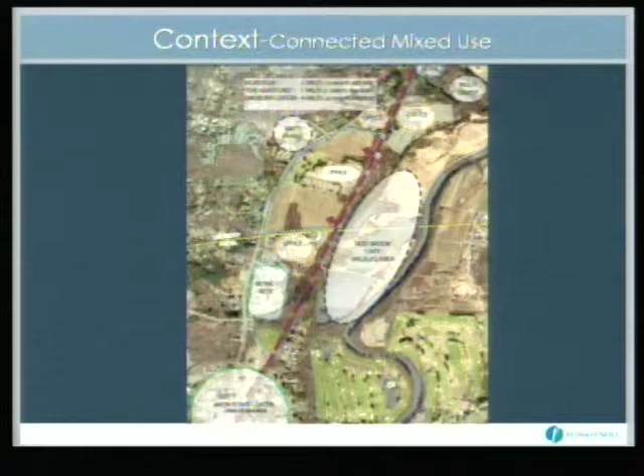And two of the key factors with respect to A, Garden Homes' interest in this development, and B, some of the initiatives in Simsbury are two things. One is we are enamored with the relationship of that bicycle trail and how it connects all of the various components, not only to downtown Simsbury, but downtown Avon, the mixed-use office areas, and then directly across from that bike trail, the Nod Brook Wildlife Sanctuary. These are important elements for a developer. It creates uniqueness, it differentiates this type of project from other projects.

So again, this particular site in this area of Simsbury has certainly not been unstudied. There's been a lot of study here. The POCD specifically supports mixed use in this area and goes so far as to establish desirable performance objectives, which we'll talk about more when we talk about the design. The incentive housing zone study was done a few years ago. Basically, this site was a Tier 1 priority to be designated as an incentive housing zone, which recommended mixed use with approximately 250 units of supported mixed types of housing.

Fuss & O'Neill basically did the Route 10 corridor study, so we're very, very familiar with the character issues associated with two things. One is the continued view to those ridgetops and to the Heublein Tower, and two, to maintain the two-lane character of Hop Meadow Street through the area.

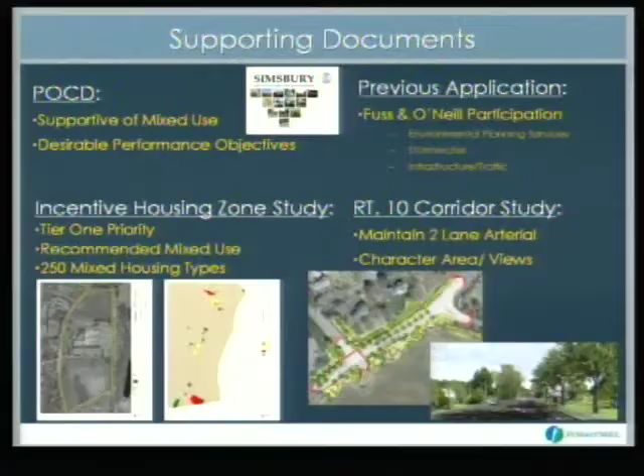And what I will say, as part of even previous applications for this site, Fuss & O'Neill was involved in the infrastructure, stormwater management, and traffic and transportation aspect of that. So we have a lot of data.

In fact, we had our traffic engineers, for example, crunch some of the data and indicated that from a traffic generation standpoint, it would generate approximately half of the volume that was associated with that previous application a number of years ago. That previous application was still able to, within reason, maintain, depending on definition, a two-lane road, and it would be studied further as we get into the application process, but clearly the traffic impacts are substantially less and the two-lane character would surely be maintained.

POCD goes as far as creating fundamental tenets for this particular site. I mentioned a couple of them: preserve views, the open space along Hop Meadow Street, a part of an open space to be preserved to try to symbolize the character of what are now fundamentally open farm fields, and then access to the recreational areas, which I mentioned prior.

So a little bit about the analysis. We're very careful about how we place buildings on this site and where these buildings go and what density looks like on this site to try to maintain those tenets for the site.

What this shows is these are view cross sections through the property and then up to the ridge line, the Talcott Mountain ridge line. And they're taken in a number of different areas. And these little enlargements, although difficult to see, talk about a one-story pitched roof building, two-story and three-story, and where they would need to be placed on the site so that, from a view from Hop Meadow Street, you actually see over the roofs of those buildings and still get a view of that ridge top.

Now, that's not to say that there might not be some buildings blocking some parts of it, but the idea of this design and the planning process is to basically try to maximize the view to those ridgetops.

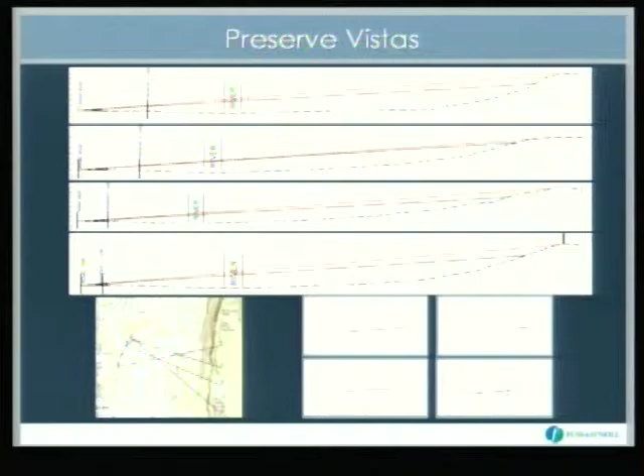This is the resultant analysis from those cross sections, and these pastel shaded areas: the front of this right here is where a one-story building with a pitched roof could be located and you'd still be able to see the ridge line. The next layer, sort of yellow ochre, is where a two-story building could be placed and still see the ridge line. Similarly, this point, three-story, and at this point, we just put this on for illustration purposes, that is a three-story building and you'd still see 200 to 300 vertical feet of the top of that ridge.

So what does this do? Initially, when Garden Homes came to us, this was the site that they wanted to look at. After we performed this analysis, it was very clear that any type of density, vertical density, on this site would have some substantive impacts to the views to those mountainsides.

We basically suggested that they look at this site right here, because as you can see, as this site drops off and as it has a lot of depth to it compared to the northern site, the impact to views from rooftops, even at 3 stories, is almost non-existent, and I'll show you a couple of slides that illustrate that in a built form in Avon.

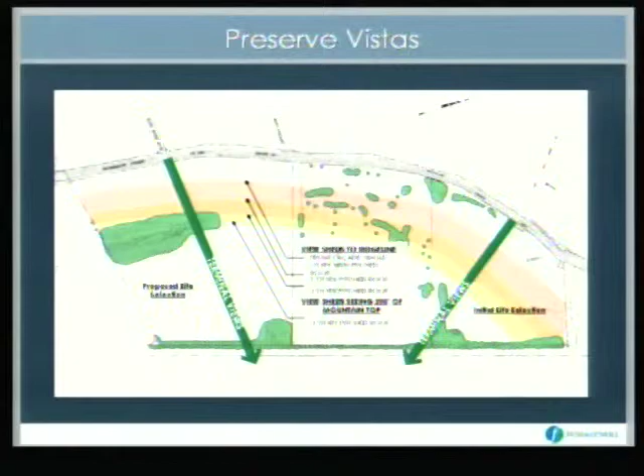What I'm going to go through fairly quickly here is a series of slides almost in movie form. You see the little red dot in the lower corner, that's going to move. We're going to go down the street, traveling south first, and show you the views into this site, and then we're going to do the same thing traveling north.

And what I want to point out is a few things. One is that it's winter, so we don't have leaves on the trees. The second is that I think you're going to be surprised at how little of this mountain you actually see. And there's a whole bunch of reasons for that, a lot of which pertain to landscape, that pertain to the ability to see or not see the mountain at any given point.

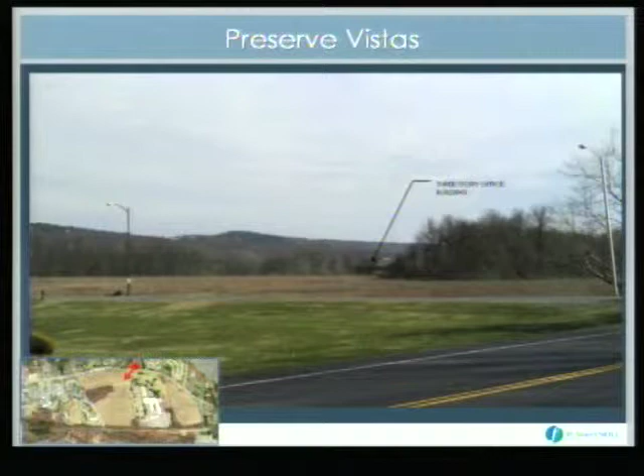But one of the things in this picture I wanted you to note, and I'm glad Hiram turned off the lights because we wouldn't have been able to see it otherwise, is that building. That's the office building in Avon. That's a 3-story building, obviously far back in the site. But what you can begin to see is that 2- and 3-story buildings that far back in the site, from a view to the mountaintop standpoint, won't have a substantive impact to that view.

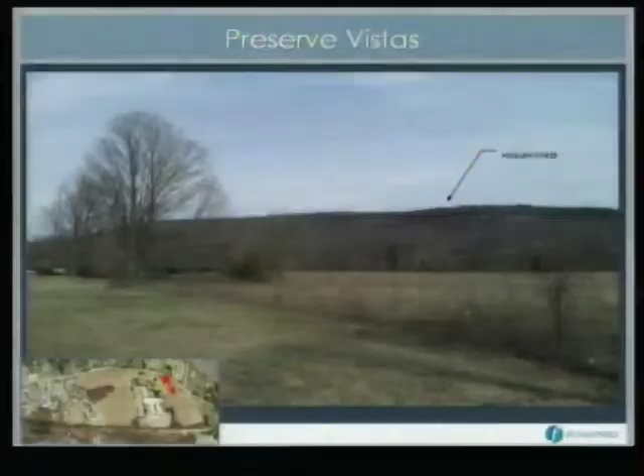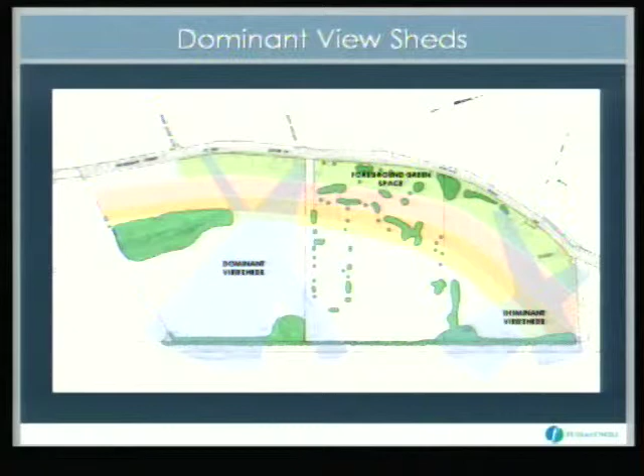And again, there's a lot of scrub vegetation along Hop Meadow Street. There's a lot of vegetation on the CL&P property. There's vegetation that will not be removed as part of the wetland. And then, of course, there's existing vegetation along the trail.

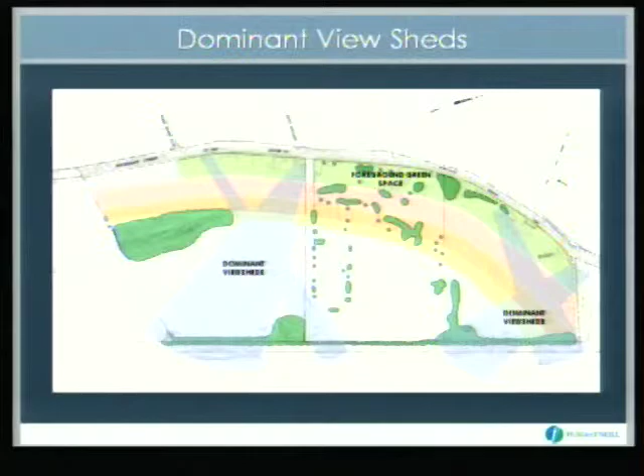So how does this relate to our development concept? The development concept revolves around a couple things. Open space connectivity, both in the front and the rear of the property. And by connectivity, I mean basically establishing a large green space between Hop Meadow Street and wherever development or pavement would occur, as the POCD suggests. Linking that directly to the bike trail and to the wildlife area through a system of open spaces and green spaces that basically create terminal views from the existing streets all the way to the mountains.

Now the data, so far, this is a concept plan, so this may or may not change a little bit as we move forward in the process. What I consider the front parcel here consists, at least in current planning, of potentially 2 subdividable sites, approximately 67,000 square feet of mixed use. Again, a mix of 1- and 2-story buildings. Our analysis tells us that putting 2-story buildings here is not a problem because you're buffered by that vegetation in the back anyway, but that these would be limited to 1-story. Now, the northerly parcel, which we had originally suggested, is basically approximately 88,000 square feet of mixed use.

Again, this is approximately a 40,000 square foot, single-story building, and I believe this one's two-story because it's set back in the site. This would be one-story, again, to preserve at least those views over that peak.

Now, CL&P is a tenant of the property, and that comprises about 49,000 square feet of existing office space and about 15,000 square feet of industrial, which then leads us to the housing component of this mixed-use facility, which would occur in this area here. Current thinking is that this would be comprised of 181 units, a mix of housing types. Fundamentally, about 150 to 160 apartments and 25 plus or minus townhouses.

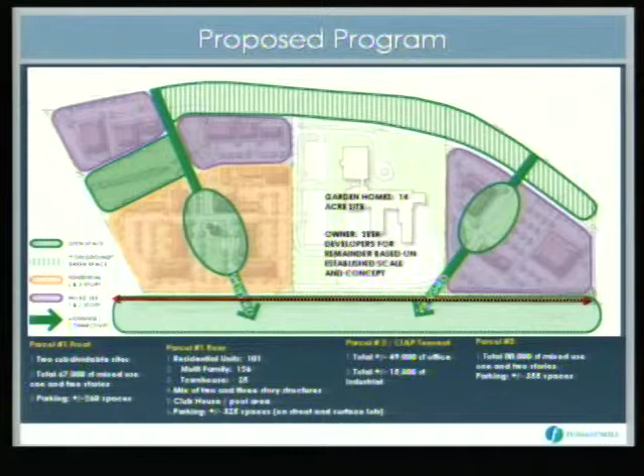The concept with building breakdown is the same. The smaller townhouses, the two-story product, go up front, toward Hop Meadow Street. The higher density three-story is in the back, which is almost contrary to the way you might start looking at developing this site, i.e. putting the density on Hop Meadow. The density is relating to and will be used by the bike trail. Again, the bike trail is an important component of this process.

So we've actually been involved in a number of the projects that have been approved recently in town, particularly residential projects. So we understand the market aspects of what we're talking about here, and Craig Seymour from RKG will come up and talk to you a little bit about that.

Great, thank you, Chris. Again, Craig Seymour, I'm Managing Principal with RKG Associates. We are familiar with Simsbury, having worked here a few years ago on a question with the Simsbury Airport. What we were asked to do is an assessment of the potential demand for residential housing, rental housing in particular, in Simsbury. Our conclusion is we estimate there's a demand for around 175 units annually over the next 5 years based upon population projections.

And remember, the demand for housing comes from really two different areas. One is increase in population and number of households and the changing demographics within that, as well as income, in terms of the types of housing people are going to be looking for. In the Hartford market, where we looked at Hartford County as the larger market area, over the next 5 years about 8,000 new households are going to be created, both from new household formation and from population growth, people moving in as well as the organic growth that's here.

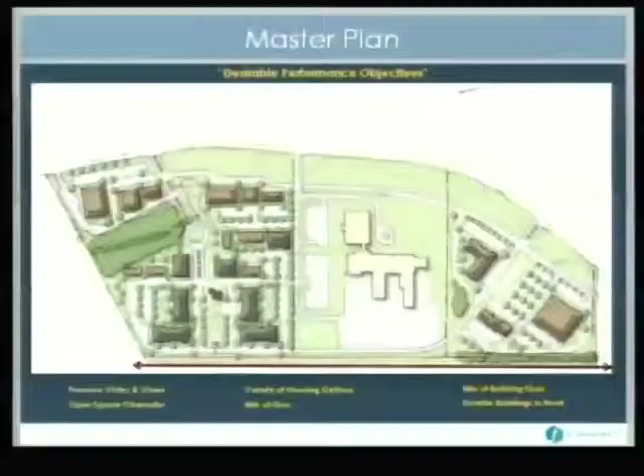Thanks, Craig. Great question, Tony. So that's a good segue.

I mentioned earlier that the Plan of Conservation and Development talks about desirable performance objectives. So I want to talk a little bit about how this concept, and it is a concept, so again, we're here today to garner information from this group, but this is a concept of mixed use whereby your mixed-use components, your larger building footprints, although lower roof pitches, for the reasons I stated before, occur toward Hop Meadow Street.

These are mixed-use components that probably would be comprised of some of the things that Craig Seymour talked about, and in particular in the two-story buildings, the second floors would potentially be comprised of additional residential units or office space as market demand required. Clearly, the 14-acre piece of land, which is under option currently by Garden Homes, is a residential component.

So these performance objectives, we talked about some of them already, preserving the views and the vistas and the open space character, so you can start to see how we're looking at these terminal views and open space, both in the front and, not shown in this graphic, the Nod Brook Wildlife Area to the rear, as that connectivity with the bike trail, providing accessibility and multimodal opportunities to Simsbury, to Avon, to whatever happens at the Hartford, farther north, farther south.

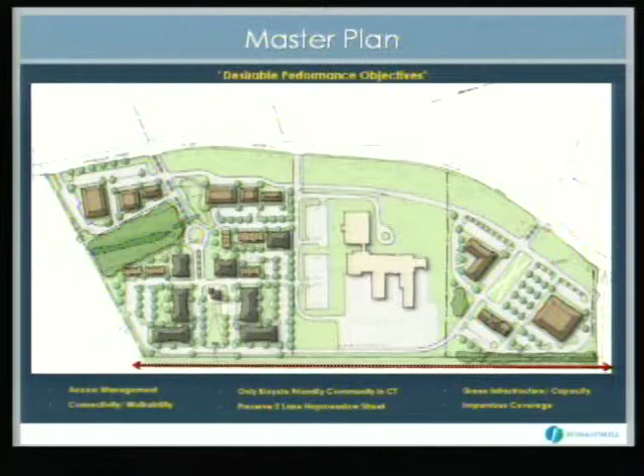Again, to continue, yep, sure, Tony. To the right, that's Avon, and that's the office buildings in Avon, right? To the left is actually Avon. Oh, yeah, to the left, I'm sorry. Yes, right. So the office buildings are right here. Okay. What did I do here? Okay. So continue with desirable performance.

Access management. So Fuss and O'Neill was part of the Route 10 corridor study, and access management on this parcel is a huge thing. The access management here is basically 3 primary entrance points, one of which is existing. Also, there's an existing access easement in favor of these adjacent properties. So we would really be utilizing the existing CL&P driveway to access substantive portions of this, therefore minimizing the curb cuts along Hop Meadow Street and allowing us to accentuate what amounts to football-sized meadows in the front yard of these buildings.

So part of what this PAD zone does is, to some extent, establish the design controls for the housing part of the development, which would be occurring in the near term, but also for the mixed use and commercial development that would be occurring in the longer term. So we're establishing, as part of this process, the scale. We're establishing the density, parking, general layouts, and satisfying the tenets and the desirable performance objectives of the Plan of Conservation and Development.

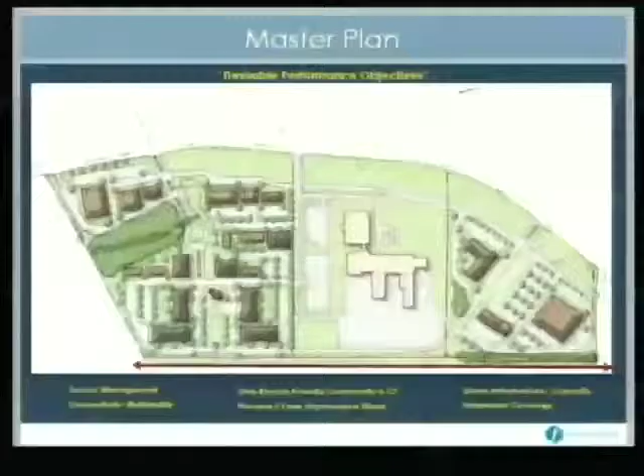This is a very low-value, quite frankly, meaningless wetland that we would be disturbing in order to remove the vegetation that I talked about before, open up the terminal view, and then create basically new wetlands with lower vegetation in a wetland mitigation area, again, fronting on Hopmeadow Street. So in general, that's the sort of level of activity that we'd be proposing here.

We talked about the ability of keeping Hopmeadow Street as a 2-lane road, which is very important to the town. It's important to us, and it's achievable in this plan. And lastly, the importance of that bike trail. Simsbury is the only bicycle-friendly community in Connecticut. And in my personal opinion, this particular type of project, with its emphasis on that, really supports that initiative.

We are not quite sure what the architecture is going to look like yet, but Bill Krosky has done a lot of work in town and out of town. His specialty is housing. His specialty is historic preservation. He worked on Eno Hall with me a number of years ago. This is just a smattering of the potential different housing types, from the low-density townhouse, which is more in the front of the project, to a little bit of the higher density. This would be 2.5-story to 3-story type units.

The project will have a clubhouse facility in the center green. That center green is right here, and it's a 1-story building, so it doesn't block any views. That clubhouse will probably have a swimming pool, and there'll be bike storage facilities and potentially even zip bike programs down toward the bike trail. Again, not getting into too much detail with architecture yet. As we come back with an official application for the PAD zone change, we'd have site-specific and project-specific architecture for you to see and comment on.

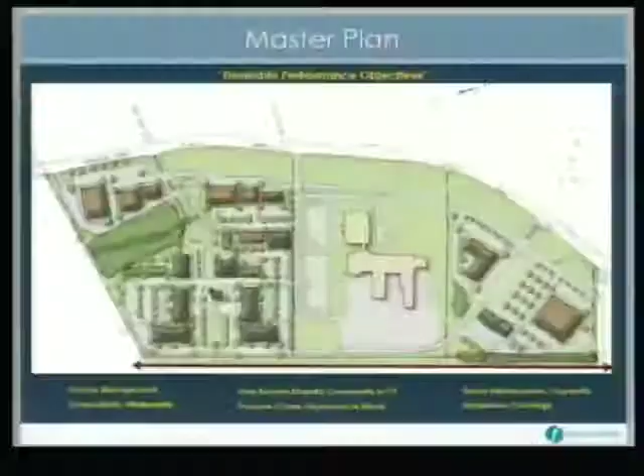So with that, that's really the... One more question. To the left again, in Avon, where there's the office park, and right next to the office park is Riverdale Farm, I think it's called? With health clubs, wine stores, plumbers, all those sorts of things you were talking about that are going to be in the front of this development. The competition is such that you think you can still, and this is a euphemism, draw a crowd when that's just 100 yards away? Craig can stand up and address this.

I'll stand up. I'll address it as a non-market person. At this moment, we're not saying that there's demand right now, but as the region grows and as Simsbury grows and as Avon continues to grow, there is an increasing demand for those kinds of retail and service activities. There's a shift in the marketplace: people much prefer to go to smaller local places where they don't have to jump in a car and fight through 6 lanes of traffic to go to a big box store. They'll still do that for certain things, but there is an increasing trend toward support for smaller local businesses. So that's...

Would you go back to the master plan? Now, if I understand you correctly, the left-hand side of this is residential, correct? All of it residential, 14 acres right here. And the right-hand side, is that residential also? No. Okay, let me go back to the left side. How many units? I don't need the answers. One drives the other: the number of units, the number of cars, therefore the amount of asphalt. Now, I know this is a concept, but I'm looking at the concept and, if I understand it correctly, there's a great deal of asphalt. We're going to be parking approximately 300 cars.

Yeah. Just one other question back on the main slide. So the development above the residential is office space, retail space? This would be probably ground floor retail service. And then these, for example, are 2-story. So above that would be office or residential, depending on what the market would bear. These are 1-story simply because of that view shed analysis that suggested we want to still see the mountaintops over those buildings.

Before I leave this slide, is there another question on this slide? Okay. Wait. Oh, can I ask you a question? Sure. Can you tell me how wide the buffer is? This buffer? I think it's about 120 feet, something like that. Okay, and the height of the one-story building? I believe I tagged them at about 17, 18 feet, including the roof. Pitched roof.

Yep. Question. Yes. Can you talk about the CLMP property just a little bit? It just seems like it's stuck right in the middle of 2 potentially nice complexes. Thank you for the compliment. Well, no, if you had your way, right, and you were going to do 2 of the 3 sectors there, what would be the 2 ideal ones? Are we stuck with CLMP right in the middle of that because we don't want to tear it down, it's too much work, effort?

Well, honestly, CLMP is 50,000 square feet of tax base. I mean, that's a business. Right. It's been in Simsbury for a long time. I would imagine it's going to be in Simsbury for a while longer. And my take on this when the client commissioned us was that's part of mixed use. That's part of why that piece is part of the plan, because it lends the office to the mixed use.

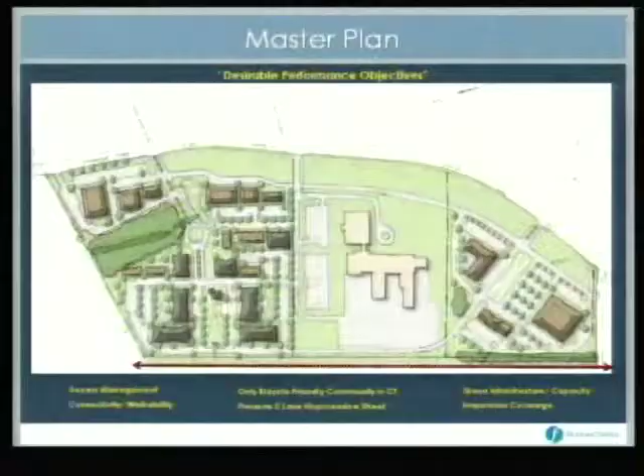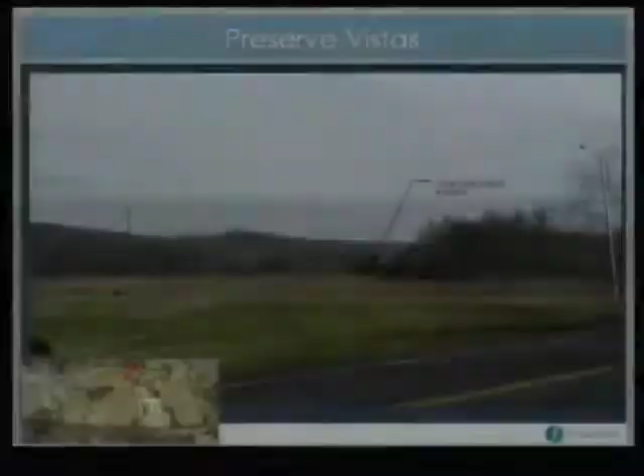Could you just go back to the very first slide? I'm glad you didn't ask for the master plan slide. Yeah. Let's see, there's got to be a... What is it? Okay. I don't know, if somebody who knows computers better than I knows the better way to get... Click the bottom left. Okay, tell me when to stop. Very first one. That one. Yep. Okay. No need to take notes, Rob.

You know, the concept of starting something there is good. Otherwise, it's going to sit there as a weed field forever and a day. Yeah, that's the point. And starting at that south end, adjacent to Avon, I hate to say it, but it sort of connects it to Avon. So there's a continuum, and not just something sitting out in the middle of a field by itself. I know someone else on Hopmeadow put some apartments recently that's sitting out in the field, and I know he's having a hard time marketing those.

So you market, unfortunately, with Avon, but the concept of starting and then moving north, you got to start someplace. As long as you meet all our stuff in the guide.

Is that the end of your presentation? That is. Okay. Questions or comments? Yes, questions, comments, absolutely. So, Jen, you want to? We're not obliged to give them feedback, but it's helpful if we do. That's why we go through this process. Correct. Yep. I think I appreciate Tony's comments.

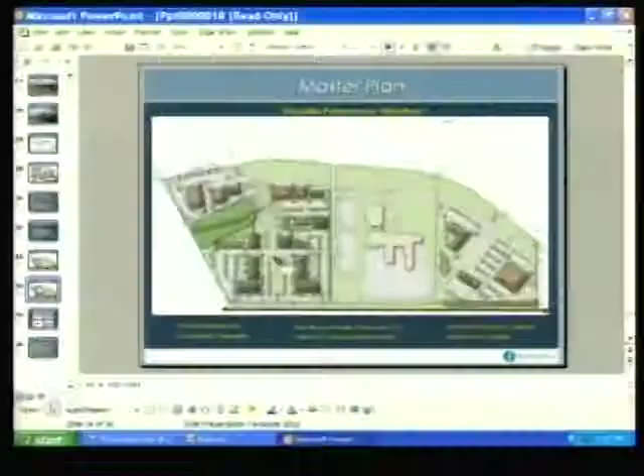Well, it provides enough parking spaces. I can tell you that right now. We're at a level of detail that is a concept level. The next level of detail would be when we submit for an actual PAD application. Now, that still will be concept, but it'll be tightened up. And at that point, I don't anticipate that shrinking at all. And also at that point, whatever gets approved out of that PAD process, we're pretty much locked into. So we won't be able to turn that to impervious surface later.

Your master plan shows Blue Ridge Drive about twice as big as Lincoln Lane. Is that part of your, you have to widen it? No. Those are right-of-ways, so those are actually 50 feet property lines versus the road width, which is probably only 24 to 26 feet. Okay. And another question on this slide, is that Old Meadow Plain? Yep. Is it lined up with the entrance? Yep. And it's signalized? Yep. You're not anticipating a signal at Blue Ridge? I talked to my traffic guys about that, and they're unclear whether we have the volumes to get that signal or not.

Clearly maintaining the two-lane character of Hopmeadow is paramount to the town. You can play games with that, and the games have to do with how long your turning lanes are. A long turning lane can feel an awful lot like a three-lane road. So the idea that this is literally a little more than half of the volume generated versus the previous application, and understanding where we were with the previous application, leads me to believe that we're probably in a pretty good place with respect to that. Again, more detail to follow as part of the application process.

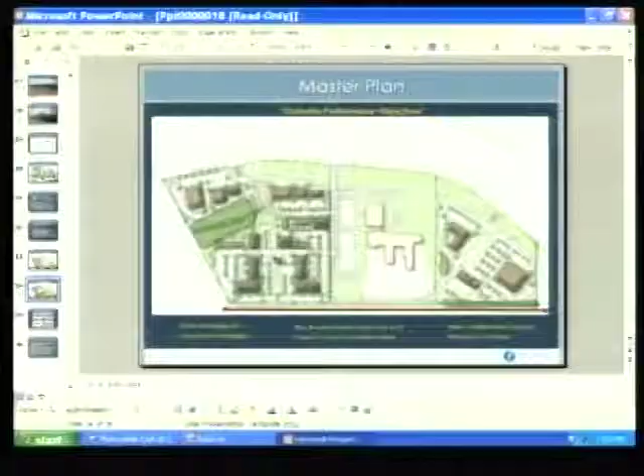Just wanted to address the design review board. Anthony, you're the design review board. Your comment about only the people on Lincoln Lane care about what they see is a preposterous thing for somebody who serves on the design review board to say. You're supposed to care about design, aesthetics. I am. I care about what's in our guidelines. And I told us we follow our guidelines. But the young lady back there said that everyone's worried about that. Down a road, when the whole concept is to preserve a vista, is not consistent with the mission of what I think somebody who sits on the design review board should do. Or did I apologize?

Okay, so we appreciate very much. I'll speak for the zoning commission. Thank you. Go ahead. I'm very big on timelines, but no, we appreciate your efforts. I think you've gotten some feedback from both the design perspective and the zoning perspective. Generally receptive of you moving forward. This is a process that does require approval by your elected officials on the zoning and design review board, and we do take seriously what we approve. And if it changes, it needs to be reapproved or not, because we take that into consideration all along.

One last comment from me. I would be very interested in as much detailed marketing information you have about the housing market, because it is so close to Avon, other projects underway there, just so that we know that you guys know. I mean, you're taking the risk, you're putting the financing into it, but it does impact. We want to be sure that these get filled. But I think from the zoning, we certainly didn't see anything here that would say not to move forward. Right. Great.